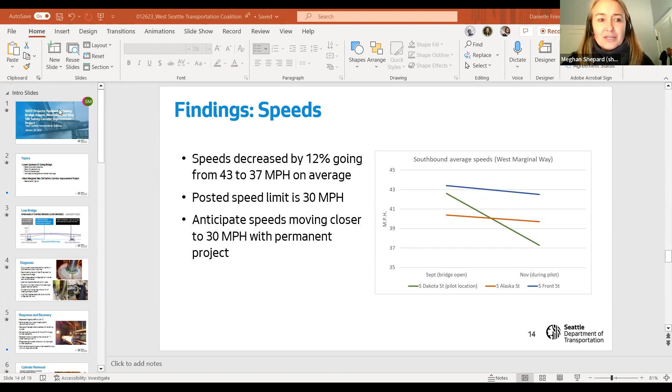Hello everyone, thank you so much for having us here this evening. I am Meghan Shepard with the Seattle Department of Transportation, and I've been the Deputy Director of the West Seattle High Bridge Safety Program for the last few years. And like you, I share the joy that the High Bridge has reopened and is able to serve the thousands of people who rely on it again. But we did have another bridge closure.

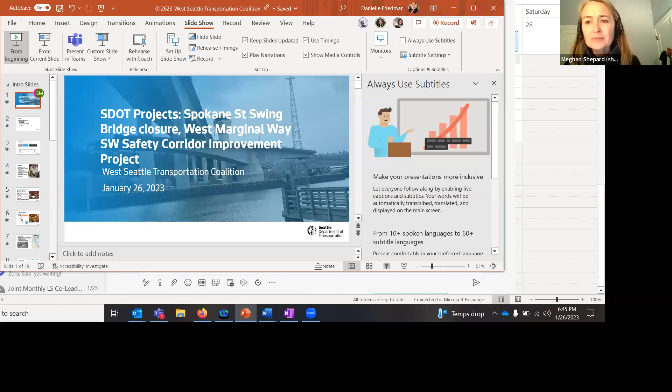That's how we greeted the new year for people in West Seattle and those in the Duwamish Valley. So we're here tonight to get into the details of the lower Spokane Street Swing Bridge, which we call the Low Bridge—what happened with the closure and how we're responding to it, as well as sharing the full slate of improvements that are planned for this incredibly unique structure throughout this year.

I am joined tonight by several of my longtime teammates, Danielle Friedman from the Department of Neighborhoods—she's supporting us tonight, and she is our outreach and engagement lead. Sara Zora is here, and she'll be talking to you later on tonight about the project we've been working on at West Marginal Way, the safety improvements.

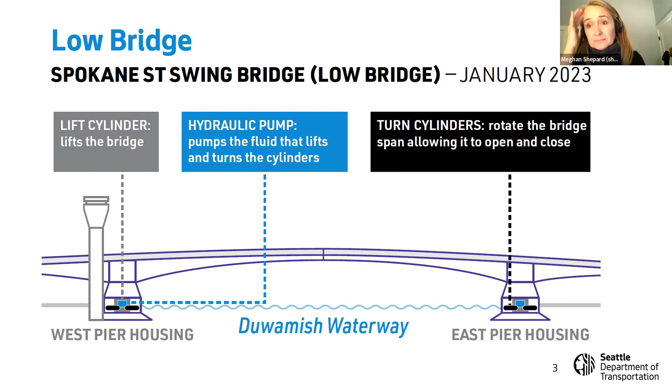So we'll talk about what happened. As you all know, we had the horrible ice storm on the 23rd of December, and the power went out to the bridge. When the power came back on, we had to get the bridge restarted. In getting it restarted, it actually took several openings to get the bridge open for a vessel that needed to get out. As you probably know, opening to marine traffic is the top priority of a bridge in the law of the land.

Then the first king tide came through, and the water was so high that it did impact some of the electrical lines that go to the bridge's tail locks. So that had to be addressed right off the bat.

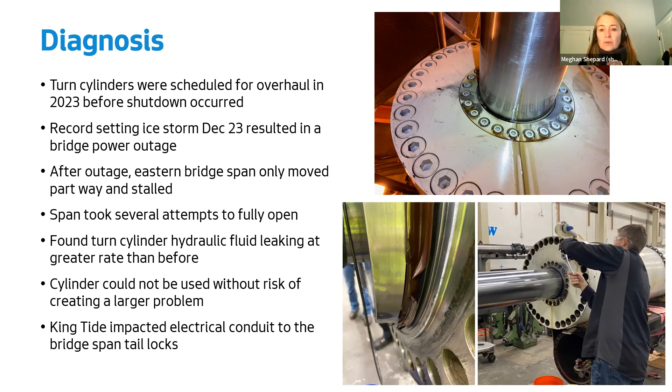What you can see in these other photos down below - there's a slightly artistic photo where you can see the brown piece there. This is showing some of the damage that was inside the cylinder once we got it out, and we're going to talk about getting it out and into the shop. You can see people investigating it here in the other photo. These cylinders are huge - 15,000 pounds a piece, and there are 2 of them on each side. We're looking at a photo here that shows a turn cylinder in the foreground, and you can kind of see there's one behind it in the background.

So the good news is, before we get into the details, the operations undertaken with the bridge were successful, and the bridge did reopen on January 13th. So it was a 3-week closure, almost 3 weeks, that the low bridge was closed. And this, of course, happened between Christmas and New Year's. There were some good things about that, in that freight traffic to Terminal 5 was pretty light. At that point, we were past the holidays.

The first issue we had to acknowledge and deal with is that without the low bridge, there was a significant impact to people walking and biking, because the detour route available to them wasn't complete, and it took them about 5 or 6 miles out of the way. That became an immediate concern for the incident team working to address the closure.

The diagnosis was to remove the leaking cylinder and operate the bridge on one cylinder. The bridge was actually designed to do this, and we had to go through this process before, back when the bridge opened in '91. A year later, all 4 cylinders had failed seals inside and had to be replaced, related to original calculations about supporting the cylinders. There were still some folks around who remember doing this back in '92, '93.

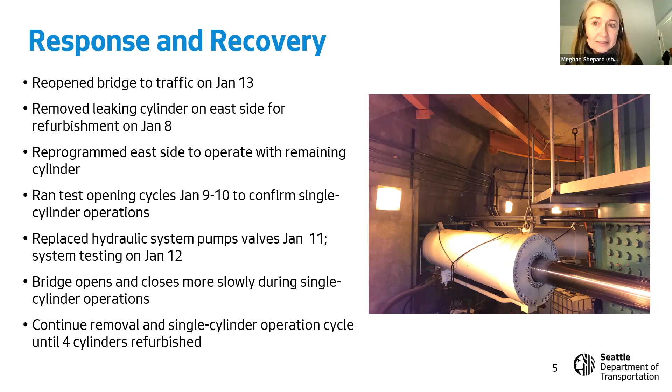So that's the plan. If we go to the next slide, I just want to illustrate this because it was quite the operation. I had the good fortune of being there, in the presence of a lot of hard-working members and talented problem solvers on SDOT's roadway structures crews who took the cylinder out.

Here's a photo showing the cylinder in a custom-built cradle. It's also supported by a custom-built lifting beam, being pulled out of the pier house in a circular motion all the way around on the crane rails above. You can see them. Then they had to get the thing out the door and onto a flatbed truck. It was a 12-hour operation to get that done.

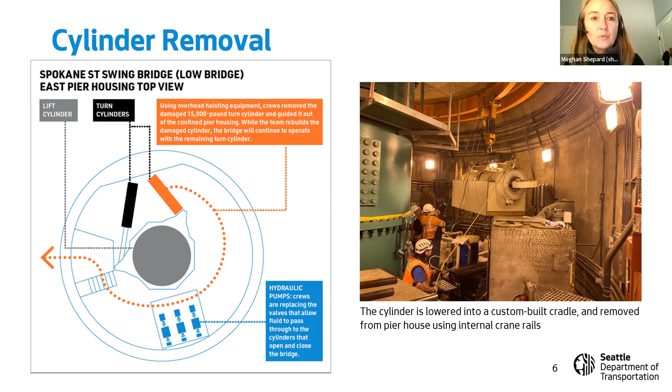Before we talk about what comes next for the low bridge specifically, I wanted to talk about the bicycle detour. For those who have been working with us for a long time, you know we move like lightning—we were able to design and put in place a temporary protected bike lane in 2 locations. One was along West Marginal Way, where we've been working for about 2.5, 3 years now on safety improvements, including a PBL on that stretch. We'll talk more about that in a bit.

And then First Avenue South. The team looked quickly at a lot of options, and they picked First Avenue for a few reasons. One, it was going to be the most direct route to get people back onto the East Marginal Way location where folks end up when they come off the low bridge normally. The pavement was in the best condition, and it had the fewest railroad crossings. So there were a few factors like that the team took into account.

They put that in place on January 4th and 5th. About 1,700 traffic cones were out there—you can see in the photo on the left a smattering of what that looked like. Our sign shop was cranking out signs; there was one day they made 72. And as the cones and signs were put out, members of our engineering team were on site, supervising and making real-time changes.

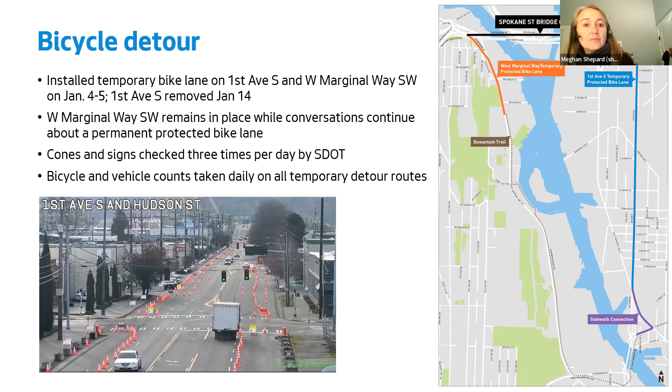The other thing we did, if we can go to the next slide, Danielle, was work in partnership with King County Metro to get free transit tickets out there for people crossing the Duwamish on the water taxi or on buses. We were able to do this through Seattle Transit Measure funds, and we promoted it through the Transit Go Rewards app.

As many of you know, that's an app we widely promoted in West Seattle and the Duwamish Valley through the Flip Your Trip West Seattle program that was active while the high bridge was closed. That program also ended on the 13th when the low bridge reopened, and 2,100 users took part and redeemed over 1,400 rewards.

So people were able to take advantage of that during that second half of the low bridge closure. We learned a lot about speed and moving quickly, and these are learnings we can take with us to future situations. Michael, I see your hand up.

Yeah, I just had a curious question looking at the photo there. Any sense from the county, did we see more bicycles taking the water taxi as a result of this program and people taking advantage of the rewards, or we just don't have that data?

I don't have that data yet. I know we're trying to pull it all together, and I'll turn to Sara and Danielle to see if you've heard any feedback like that from King County Metro. Not at this time, Michael, but we can definitely look into that a little bit more. Yeah, it's a really good question, observation.

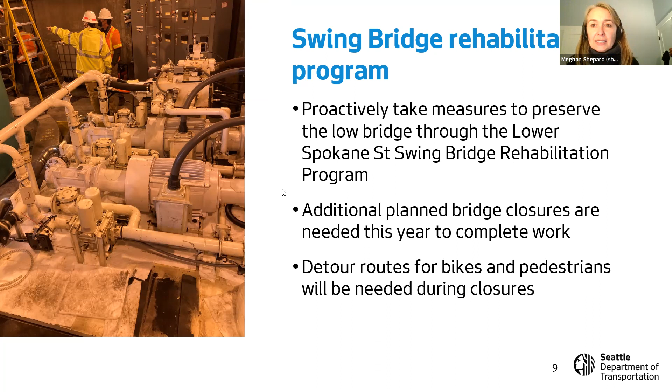So the next slide covers a little bit what's coming up. I do want to go back and mention that we did strengthen the bridge, completed that in October of 2022. That was Kraemer, who also did the work on the high bridge. They added carbon fiber wrapping and epoxy crack injection, terms you have all heard many times, to the low bridge.

That was part of the strengthening that happened. We did some new pumps last fall as well, and we're going to do more new pumps in February. I mentioned the lift cylinders - we have a similar effort where we need two and we have three. So we refurbish one while the other two are working, then we swap it in, take one out, refurbish it. We've got a newly refurbished one coming in, that'll be this spring sometime.

And then the controls and communications of this bridge are original. You can imagine all of the technology advances we have had since the early 1990s. So we are really looking forward to being able to put a new communications line that will go underneath the Duwamish. Right now those lines run up and around the high bridge, and a whole new control system. So those projects are in the works as well for this year. And then we will add the sluice cylinders and lots of other maintenance and replacement items as we continue to focus on keeping this bridge preserved and maintained.

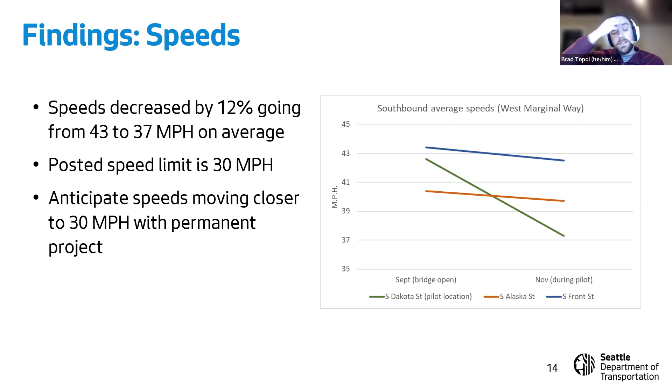Next slide, please. So what did we find when we looked at specifically our speed data? This is in the southbound section, we looked at 3 different segments of roadway. We looked at Dakota Street, or the area around Dakota Street, which is kind of right by the Parks and Recreation facility out there. That was kind of where we took that data. Then we looked at Alaska Street, where there was an existing single lane condition there, southbound. And then we looked at Front Street at the south end of the corridor, where we have an existing 2-lane southbound section.

So our before and after at Dakota, that was the only thing that switched. Before the pilot, we had 2 lanes southbound, then we narrowed it to 1. So it's the configuration you see today with the cones and barrels out there. And then Alaska maintained being a single lane, and Front Street maintained being 2 lanes.

What we saw is a 12% decrease in speed, which was what we want to see. We want to see that behavior change. It came more in line with the Alaska Street speeds, where again, there's a single lane condition there. From a Vision Zero standpoint and a safety standpoint, that's what we want. We want to see slower speeds, speeds that are more in line with the speed limit. They're still not as low as we'd like them to be, but they are an improvement. We know that things like a 5 or 10% change in speeds can have a drastic decrease in collisions, a 20 to 25% decrease in total collisions. So we saw that as a big benefit.

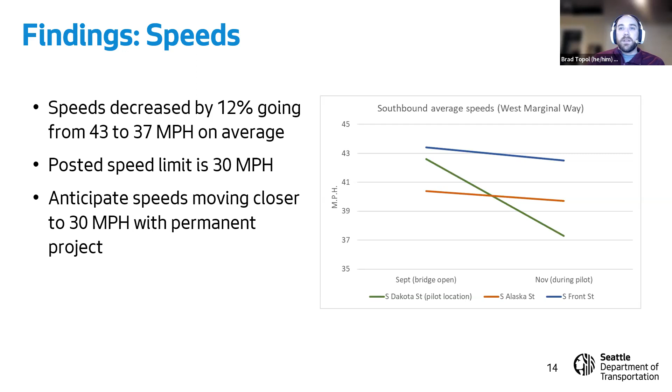So what are we continuing to do in addition to the Protected Bike Lane project? We have been working with some of the other freight stakeholders out there on the south end. We're looking at continuing to add additional markings, clearing any vegetation that may be obscuring people biking or from people driving, and encouraging people to be slow.

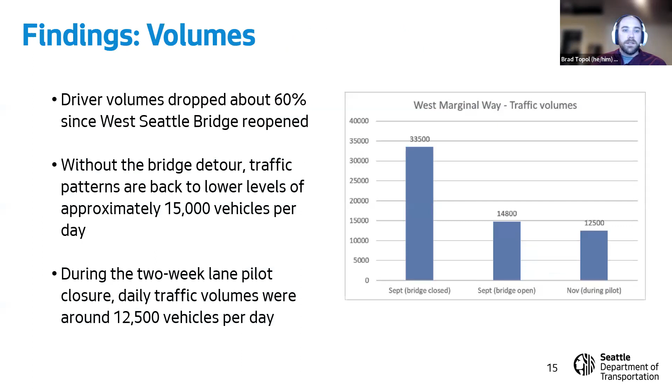Additionally, while we are expecting an increase in ridership out here, we've been doing some extra dives into collisions and things like that. We've only had a single driveway collision in the last decade on this trail, so the sight lines are really good out here. Trucks and people riding bicycles can see each other from a pretty far distance, so we're not expecting really any increase in conflicts with an increase in ridership.

So what are our big takeaways from the impacts of the protected bike lane?

Basically, what our traffic modeling showed from before the high bridge opened is continuing to match what we're seeing out there today in the field. We have travel time indicators out there that track travel time in real time, and we're seeing almost no change in the southbound direction, even from when the high bridge was closed—really negligible changes. That's because even before the high bridge closed or opened, we were seeing people travel through this area above the speed limit without delay.

So that hasn't changed; people are still traveling above the speed limit without delay. Our computer modeling showed an average delay of maybe 2 more seconds when we closed that single lane, because at some traffic lights people might not get that extra jump start with a single lane that they do with 2 lanes. But a lot of those signals aren't cycling too often anyway—most of the hour there's a green light at those signals. So it's really negligible impact, very on the edge of what we can even measure. That's good; we're not really seeing those impacts.

And then what our pilot data showed was that even though we're not really affecting those travel times, we are seeing that speed reduction—those speeds go down—which for us is a big important thing when it comes to safety.

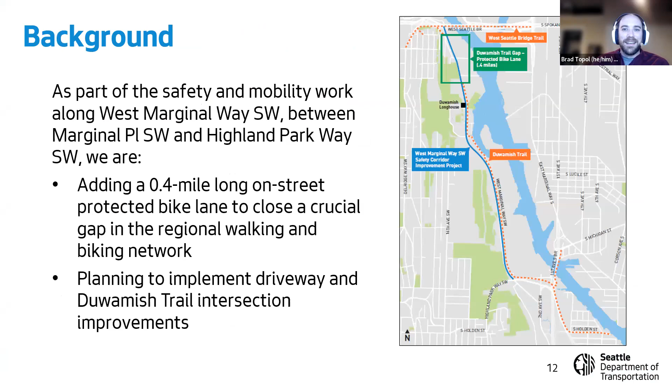Thanks, and I really appreciate the quick action on West Marginal Way. It's a great opportunity to try out things and see how driveways work for the businesses there and the interactions with bikes. I'd also like to note that doing the protected bike lane is also a really great benefit to the crossing and the things that the Duwamish tribe has been trying to achieve for the last 10 or 11 years now, to get safe pedestrian crossing there.

The temporary signal and crosswalk that are in place really depend on having that single lane up to that point, to avoid having drivers aggressively stay in the right lane and not honor the striping that's on the street, because a lot of the problems there are really from very aggressive drivers on a curve with poor sight lines.

So I think it's worth mentioning in your presentations to the public that this is not just benefiting a few bike riders and people walking, but it's also benefiting the Longhouse and Cultural Center. And I really appreciate the graphic map now that you're using that shows the whole length from Spokane Street to Highland Park Way, because it shows how short this protected bike lane is as a part of that length. A lot of people in the community didn't really understand that — they thought the whole street was getting narrowed down and was going to be a choke point.

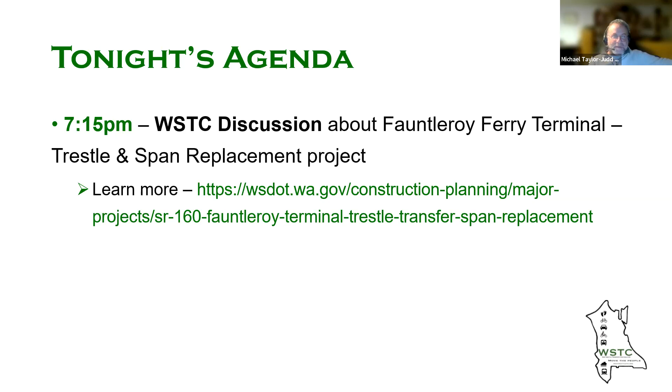Feel free to jot down that web address, and it will be available afterwards to pause the video or grab out of the agenda up on YouTube. I know I saw Vicky come in, who may have some things to say, but part of what prompted this is for folks who aren't over in that corner of the peninsula, the Fauntleroy Community Association has been pushing for folks to sign a petition.

Efficient pre-ticketing and automated toll collection would fill the dock with cars ready to board at peak times. Efficient transit connections would reduce the number of cars. Both would improve customer service. They support strengthening the dock for seismic stability and elevating it for sea level rise. But expanding the terminal by enlarging the dock or adding a second slip, they believe would degrade nearshore habitat by increasing overwater coverage, and that neither would get any more passengers to their destinations faster.